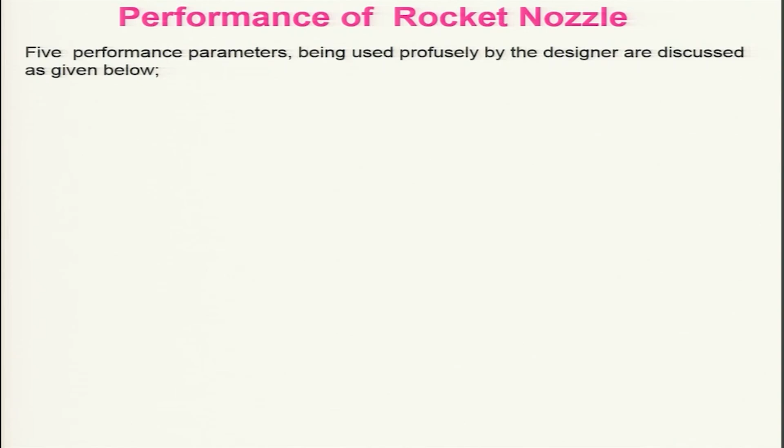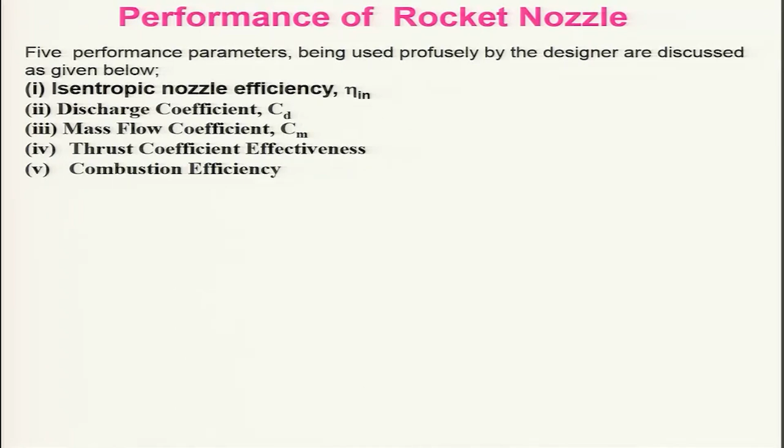Let us look at the performance of rocket nozzles, because we need to see how good it is as compared to the ideal one. For that, 5 performance parameters are generally used by the designer: isentropic nozzle efficiency, discharge coefficient, mass flow coefficient, thrust coefficient effectiveness, and combustion efficiency.

And let us look at the expansion process in a TS diagram. When expansion occurs in a nozzle, this is the ideal one and this is the actual one. You can see that there is a change in entropy. So, this corresponds to actual. Therefore, we can define the nozzle efficiency as hT2 minus hE, the actual one for the pressure ratio PT2 by PE, divided by hT2 minus hES, the ideal one corresponding to enthalpy.

And if I assume Cp to be constant, I can write the isentropic efficiency as TT2 minus TE divided by TT2 minus TES. This is basically VE squared divided by 2, over VES squared divided by 2, and this is nothing but your isentropic efficiency.

And this isentropic efficiency, as I told, I can write as VE squared divided by 2. Taking Cp as a constant and taking TT2 out of the bracket, I get Cp TT2 times 1 minus TES by TT2. Since this is isentropic flow, we can express that in terms of the pressure ratio PE divided by PT2 to the power gamma minus 1 divided by gamma, and in place of Cp I can write gamma R divided by gamma minus 1, times TT2.

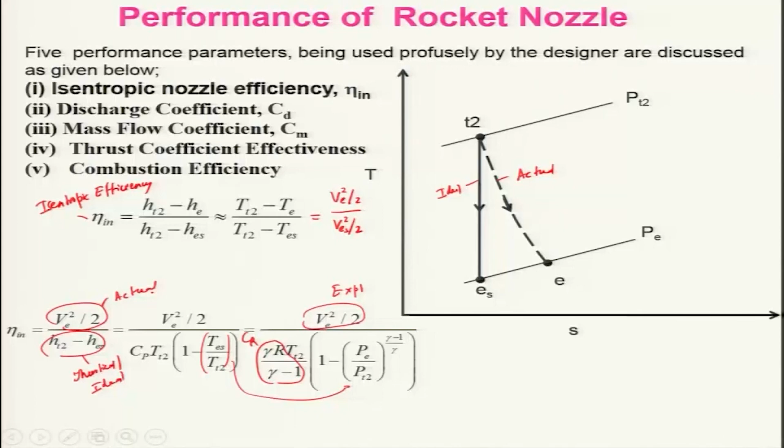You can see that I can get this very easily from experiment, and I can calculate it theoretically, provided I know the pressure ratio PT2 by PE, and of course the combustion chamber temperature TT2 and gamma. So, this is the theoretical or ideal one, and this is your actual one, and these values will vary from about 0.9 to 0.98.

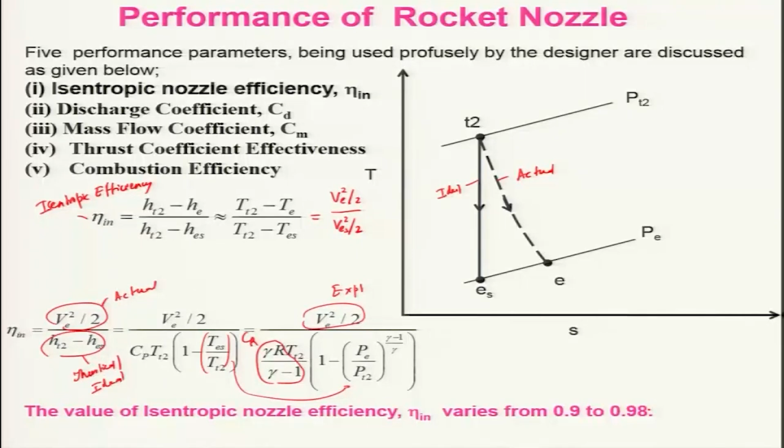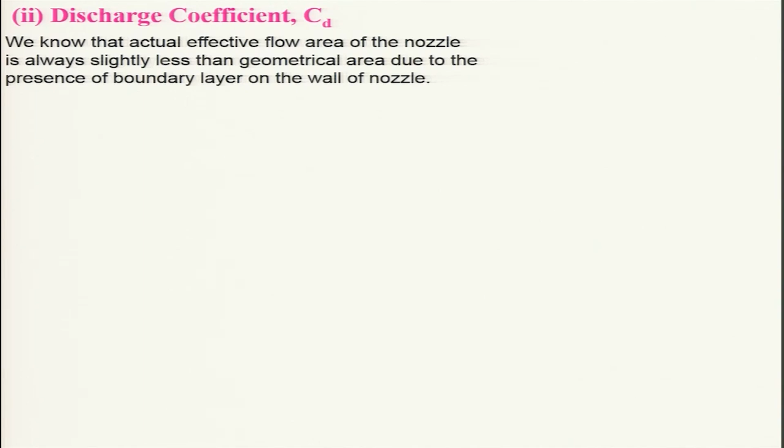So, let us now look at the discharge coefficient, which comes about due to the boundary layer effect and other things. We know that the actual effective flow area of the nozzle is always slightly less than the geometric area due to the presence of the boundary layer on the wall of the nozzle. Therefore, we define the discharge coefficient as the actual mass flow rate divided by the ideal mass flow rate.

For mass flow rate, I can write rho E AE VE, the actual mass flow rate, divided by rho ES AE, where A remains the same, and VES, corresponding to isentropic flow without any boundary layers. So, I can write this in terms of TES and VE, and TE and VES, as TES divided by TE, and the root term can be written as VE by VES, which is the efficiency I have defined.

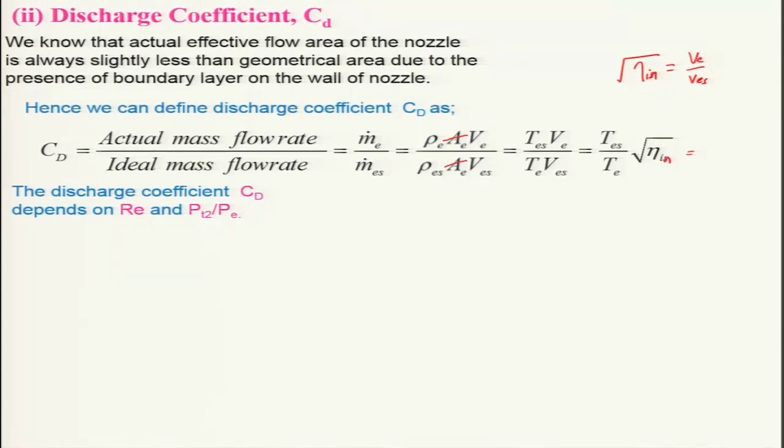So, the discharge coefficient CD depends on the Reynolds number and PT2 by PE. If you plot it, CD is a function of pressure ratio. In subsonic flow it does not change much due to the Venturi effect in the CD nozzle, and after that it goes on decreasing because VE will be different from VES due to losses, until it attains choked flow conditions.

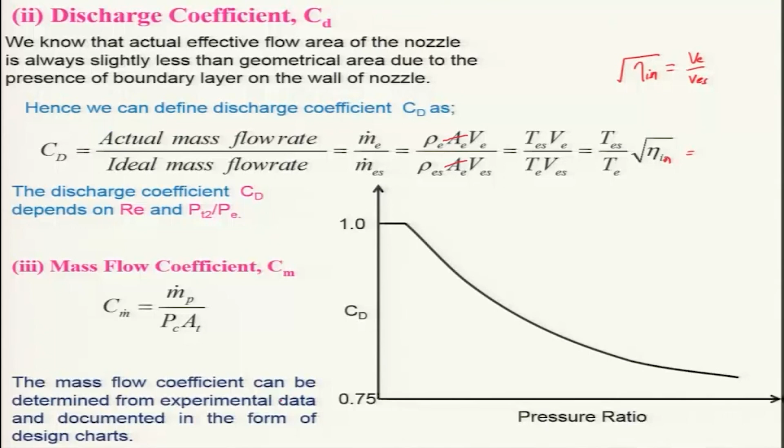And the mass flow coefficient C_M we have already defined, that is C_M is equal to m dot divided by P_c A_t, and this you can get from the experiments and also theoretical values and find out how good it is. The mass flow coefficient, as I told, can be obtained from the experimental data and documented in the form of a design chart, so that it can be utilized and you can find out how good it is from the ideal one.

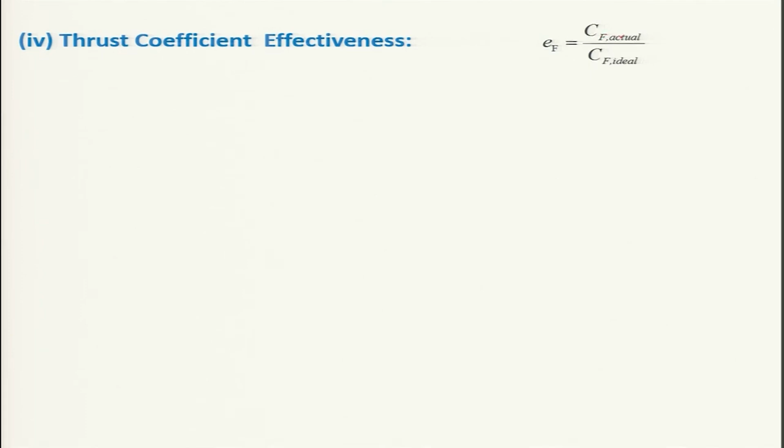And we already discussed the thrust coefficient effectiveness, that is equal to the ratio of the actual thrust coefficient divided by the ideal thrust coefficient. The actual thrust coefficient you can find out from experiment by determining the thrust, the chamber pressure and the throat area, and the ideal one we can get from knowing the pressure ratio, gamma, area ratio and atmospheric pressure.

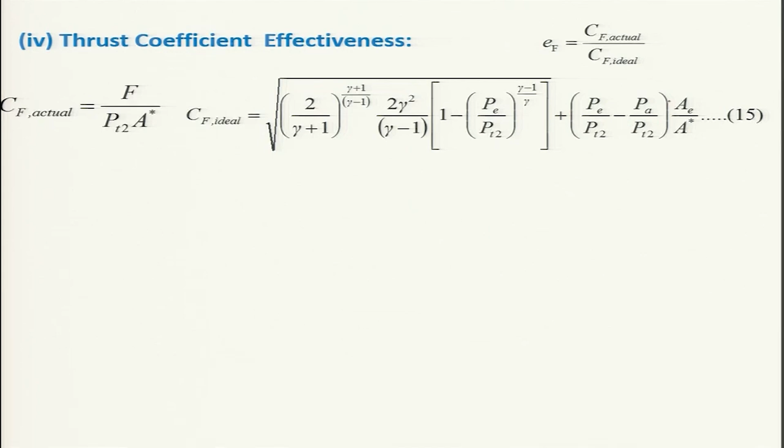We have already discussed this, and you can find that in actual practice the actual CF is around 0.98 of the ideal value, but these values will vary; you can get EF in the range of 0.92 to 0.98.

And another thing which is very much used, as I told earlier, is the combustion efficiency, which is the ratio of the characteristic velocity at actual condition to the ideal characteristic velocity. The actual characteristic velocity can be obtained by conducting an experiment, measuring the mass flow rate of propellant, the chamber pressure, and of course the throat area under choked condition.

And the ideal one you can estimate very easily by knowing the thrust chamber temperature, molecular weight, and also gamma, and these you can get from equilibrium calculations. These values will vary around 0.95 to 0.99. The combustion efficiency varies, and generally people always try to achieve a value of 0.99.

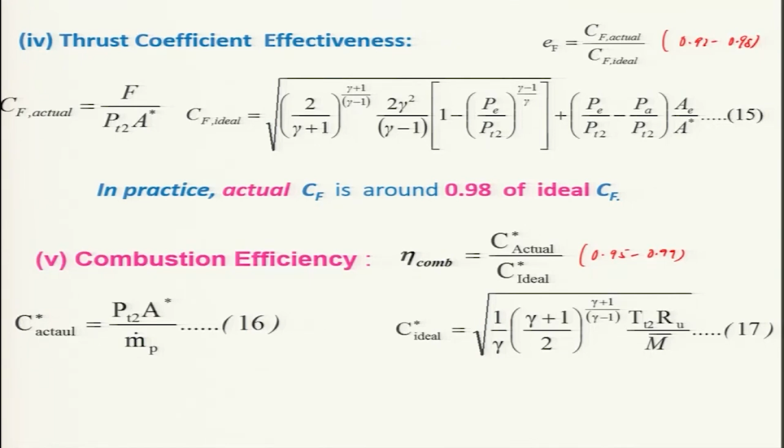So, these are the parameters which are used for evaluating the performance of the rocket engine, and we will be discussing how the exhaust nozzle velocity affects the flight performance of a rocket vehicle. A rocket vehicle, if you look at it, is basically a vehicle propelled by a rocket engine. It can be a missile, it can be a spacecraft, it can be any other vehicle propelled by the rocket engine.

So, when it is subjected to the thrust, it will be in motion provided it overcomes its own inertia, gravity, and several other forces acting on it. A question might be coming to your mind: what are the forces acting on a rocket vehicle during its flight? Apart from the thrust exerted by the rocket nozzle, it will also experience the gravitational force, drag force, lift force, and even centrifugal and Coriolis forces, and the forces applied by the control surfaces.

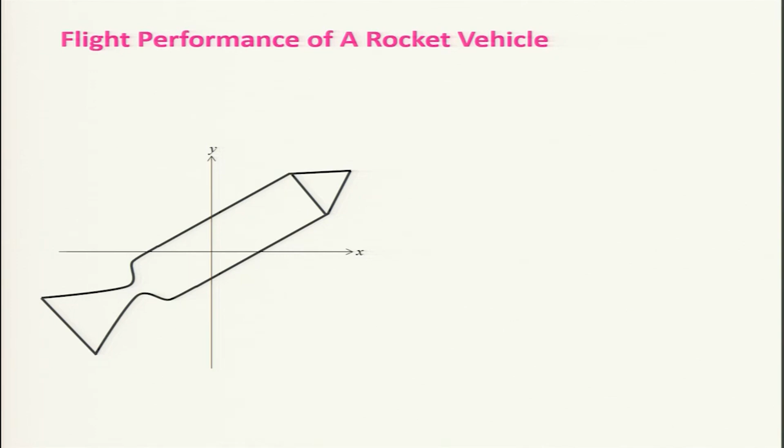And as a result, there will be moments, and the flight path of a rocket vehicle will be three-dimensional in nature. But for our present analysis, we will consider a two-dimensional plane in which the rocket is flying. Let us consider this is a rocket, and it is possible for it to fly in a two-dimensional or rectilinear plane provided no moment is acting on it. This is not realistic, but for simplicity we are considering it here.

And keep in mind it has a center line passing through like that, making an angle theta here, and this is the CG of the rocket. When the high pressure, high temperature gas from burning propellant is expanded through the nozzle, it will have a certain exhaust velocity V_e, producing a thrust, and this thrust will propel the vehicle provided it overcomes the drag force and the gravitational force. Other forces we are not considering, being small, and we consider the flight path to be in a plane, which is not possible, but for simplicity.

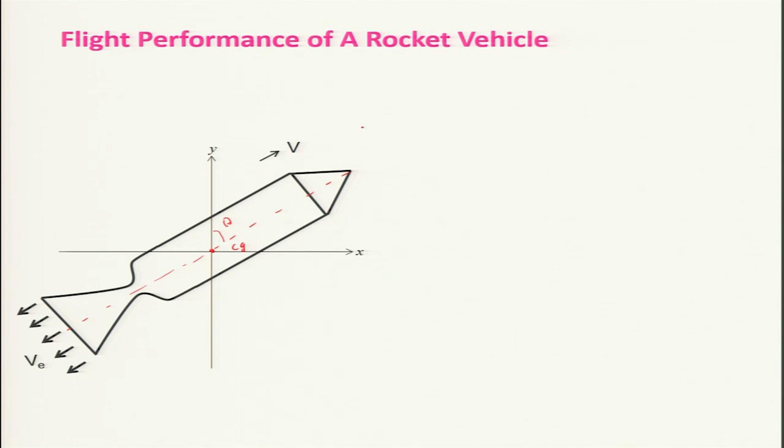So, there are various forces acting here, and those forces will make the vehicle move with a velocity v along the direction shown. So, let us see what forces are acting; as I told, we will consider the thrust, the drag, and the gravitational force. So, this is your thrust force, this is your drag force, and this is your gravitational force due to gravity.

And keep in mind, this is the angle theta, and this angle will become theta. So, we will be considering a force balance on this rocket vehicle along this axial direction, or rather along the direction of its motion. And keep in mind that during this, the mass of the vehicle will be reducing due to the consumption of the propellant, which will be getting expanded in the nozzle and moving out of this rocket engine.

So, by considering a force balance, we can derive a rocket equation. And let us look at the force balance along the direction of its motion or along the axis of this vehicle. Let m be the instantaneous mass of the vehicle, and it will be subjected to acceleration provided the thrust is overcoming the drag and the gravitational force.

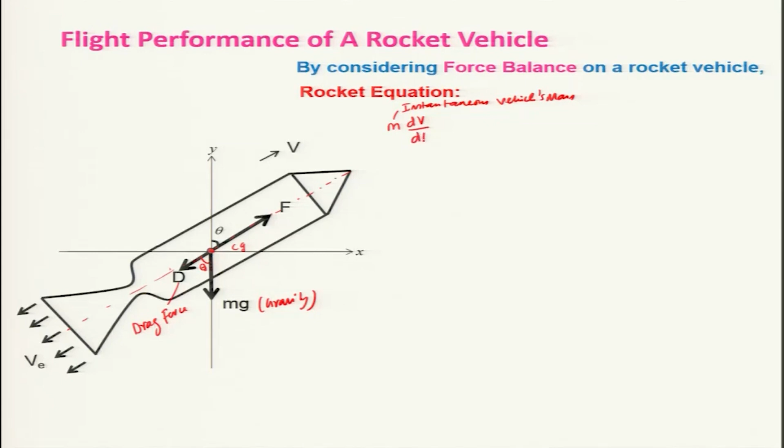Keep in mind that generally when it is taking lift from the surface, the thrust force applied on a rocket engine will be at least 1.5 to 2 times the weight of the engine. That is the thumb rule, to have some tangible acceleration, otherwise there will not be much acceleration. And m dV by dt, the instantaneous mass of the vehicle into this acceleration, is equal to F minus the gravitational force along this axial direction, m g cos theta, minus the drag force along the direction of the force.

Keep in mind that the drag force can be of various forms. It can be form drag, skin friction drag, base drag, but here we are considering the total drag due to the vehicle motion, and this drag will be dependent on various parameters, namely the velocity of the vehicle, the surface area and the density of the air through which it is moving. And this g is the gravitational acceleration at any time. Keep in mind that with altitude the gravity will be changing, being maximum at sea level, and it goes on decreasing.

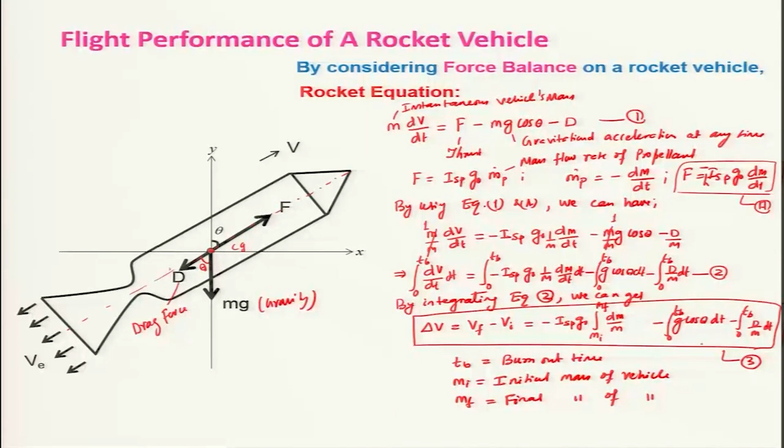So, let us look at how we can integrate this and what these terms are. That means this change in velocity of the vehicle is affected by the 3 terms. This is one term, and then another term, that we will see next.